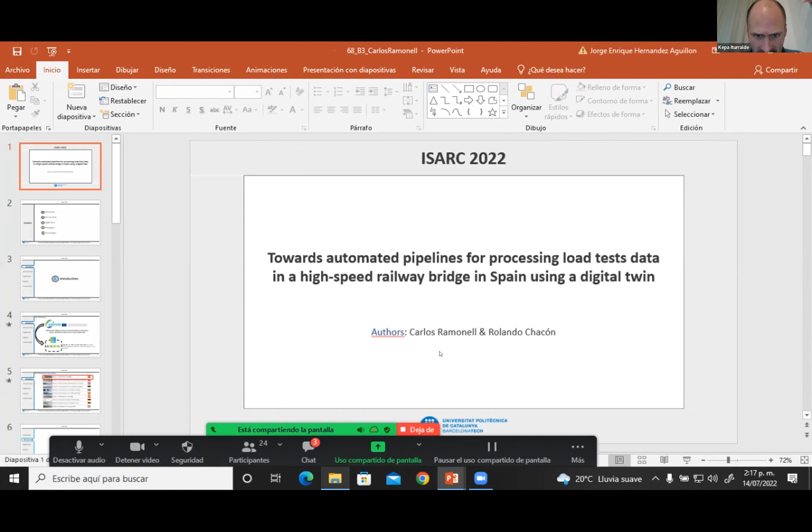The title of the paper presented is Towards Automated Pipelines for Processing Load Test Data on a High-Speed Railway Bridge in Spain using a Digital Twin. The authors are Mr. Carlos Ramonell and Rolando Chacon.

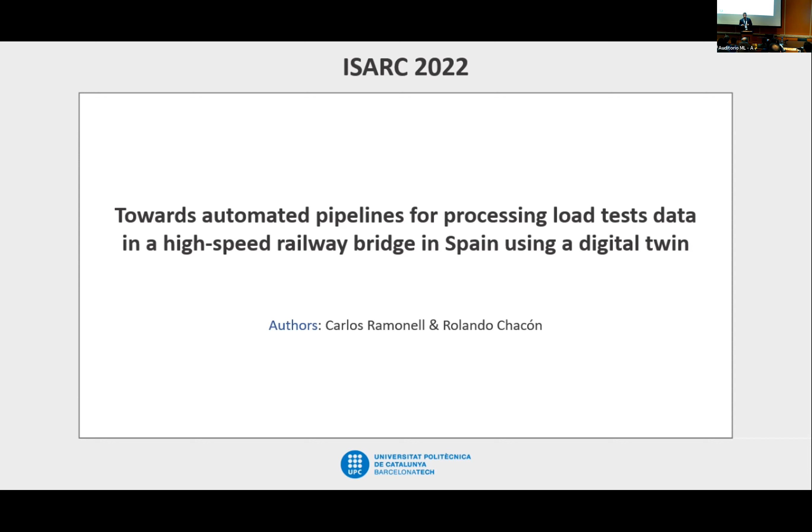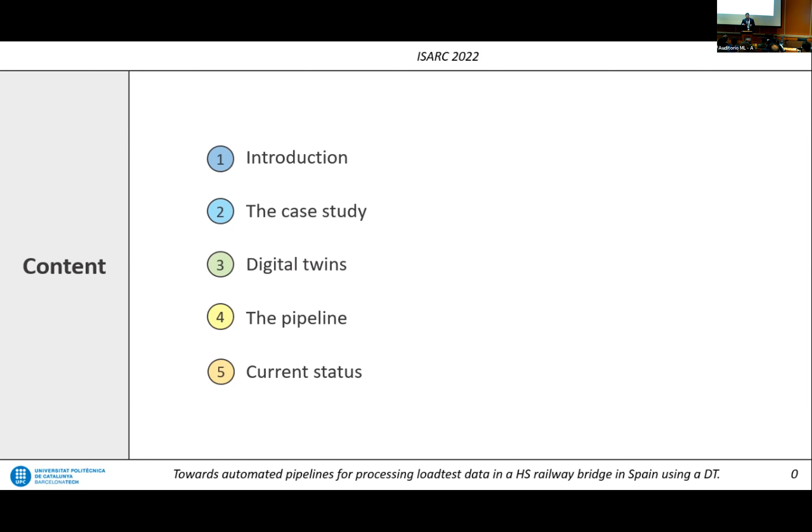So these are the contents of the presentation. First, I will go through a brief introduction of the study. Then I will explain the case study. Then I will explain how we implement digital twins in the case study, and then how we build the pipeline using the former parts. And this study was 1 year ago, so now I will make an update of where we are now.

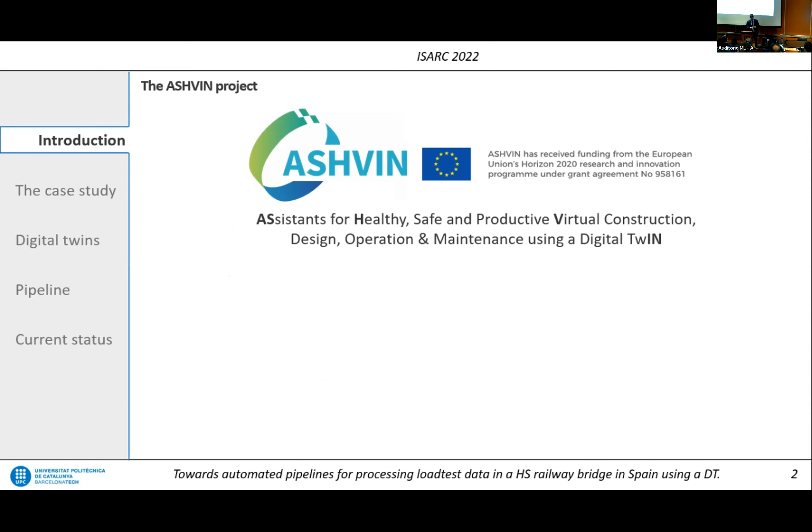So this study is carried out within the ASHVIN project, that stands for Assistants for Healthy, Safe, and Productive Virtual Construction, Design and Maintenance of Assets using Digital Twins. More specifically, we are working on the development of a toolkit that is called MATCHFEM, that aims at integrating IoT with numerical analysis to calibrate models to be used in a digital twin.

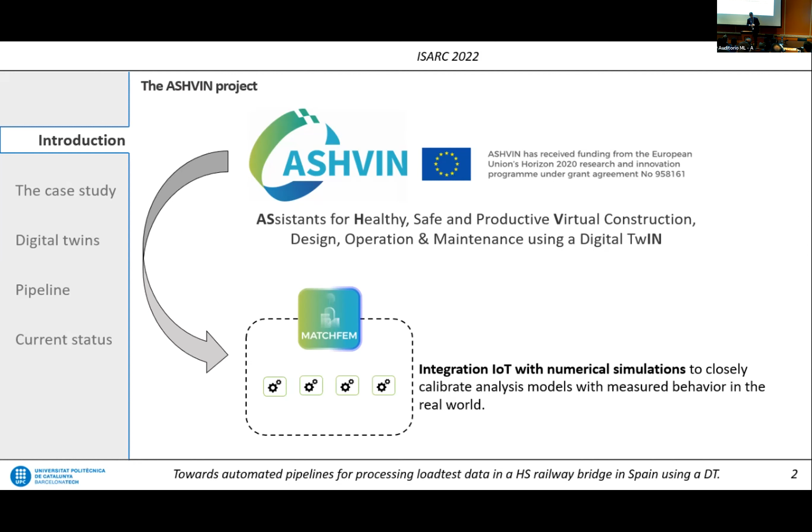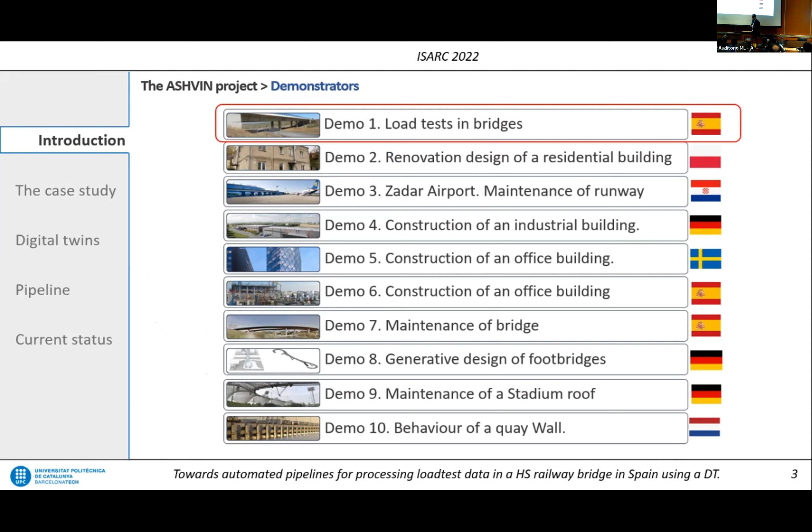So the project also provides a large number of demonstrators. As you can see, they are spread all over Europe. And we are only focusing on the first one, that is load tests in bridges. And now we move to the case study.

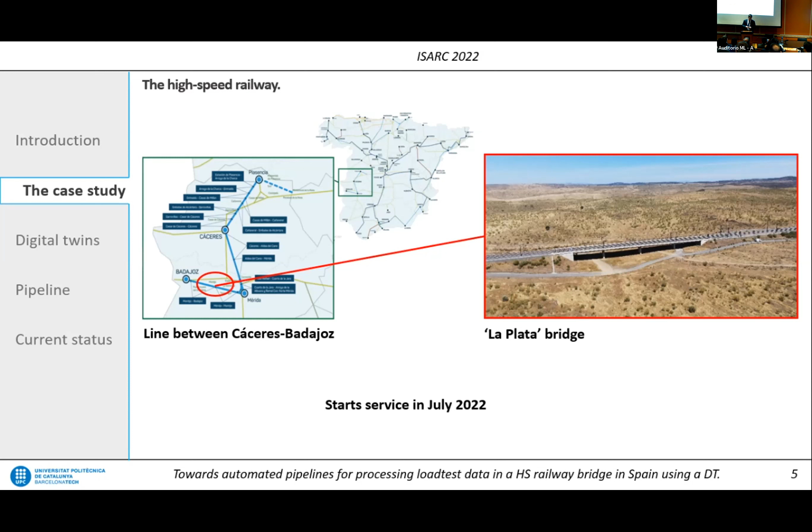So we perform load tests in a high-speed railway line that is located in Spain, in between Cáceres and Badajoz, that is a city near the Portuguese border. And this line has 4 bridges that were tested. We are focusing only on one, that is La Plata, this bridge here, that started service in July 2022. And what is a load test, a proof load test?

So it is a structural assessment that is carried out in between the construction and the operation phase to prove that the structural performance is as designed. The load test has different tests in it that can be static tests or dynamic tests, and these are required by law. And then we have a standard. It is a standardized process that the Spanish authorities made.

And the objective is to match data that we have on the field with the as-designed models that we created before constructing the bridge. And for that, we measure accelerations for the dynamic response, we measure deformations, and also vertical displacements. So after matching this data with the model, we will get a reliable model that can be used in a digital twin to perform numerical analysis in the future. So it is the birth of the digital twin's ability to perform structural analysis.

So now we want to do this in a digital twin. So how do we build one and what is it? A digital twin is a virtual replica of a real asset that is actively connected with it. In this case, the real asset has a series of sensors as information sources that send information to the virtual replica, that in our case is composed of an IoT platform linked to an information model, and to this tandem we can connect pipelines that add functionality to the digital twin.

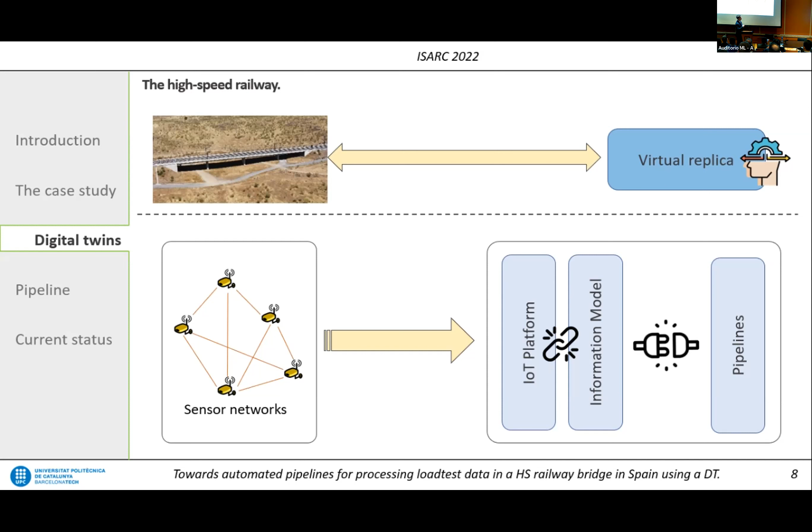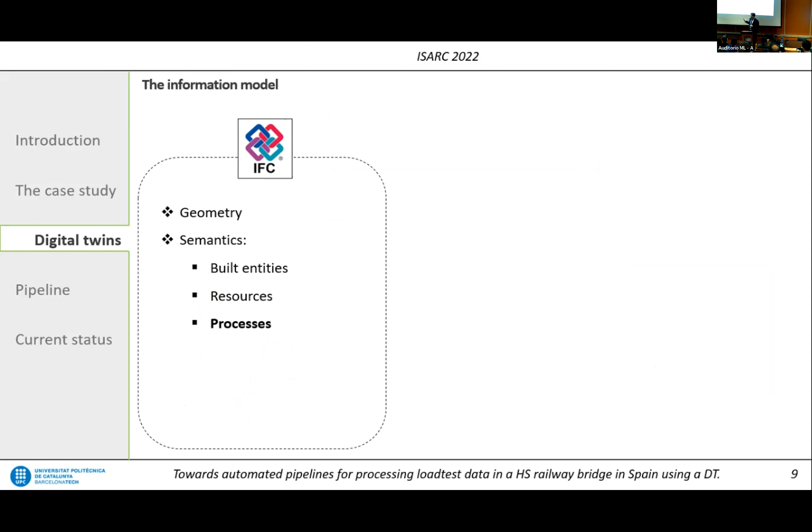So that's the bridge, the real asset. And for the information model, we use IFC, that is a BIM standard. With IFC, we can model geometry, but also semantics related to built entities, resources, and also processes. And it's in these processes where we can model the load test: each test of the load test is an IFC task that is part of an IFC work schedule, that is the load test, that is part of an IFC work plan, that is the maintenance plan of the bridge.

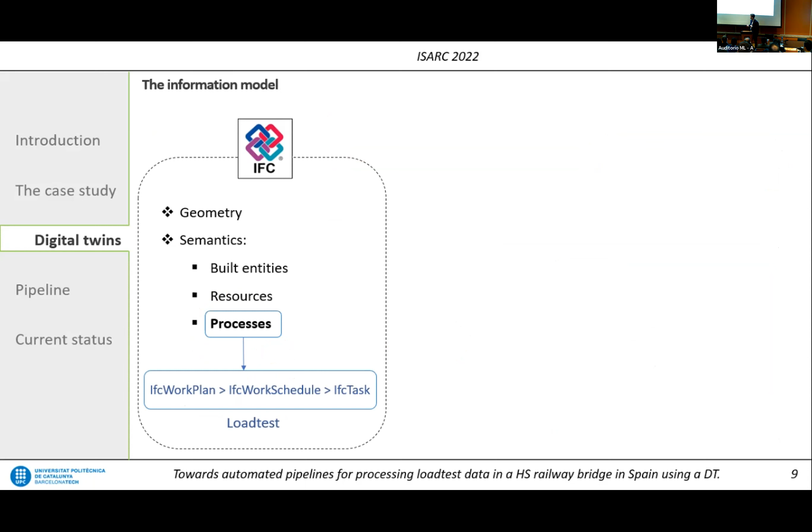So this model has a lot of interconnected information, and in this figure here, we can see how we connect the model of the load test with the model of the bridge.

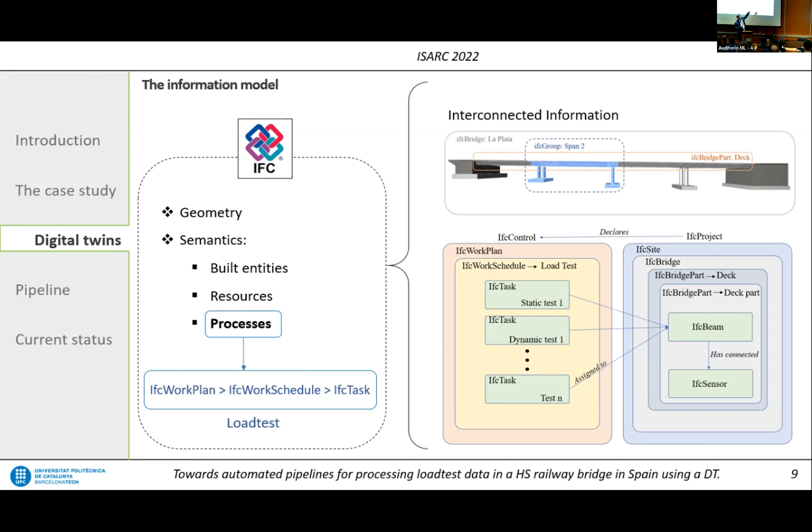You can see that we connect different tasks to a specific beam on the model, and that beam has also connected sensors, so we can access the data of the sensors through the beam that is connected to a specific task in the load test.

And for the IoT platform, we use Mainflux. That is an open source platform that everybody can use. And it's very easy to use, and it connects devices in the field with third-party applications using two entities, mainly, that are things. Things are anything that provides information to the platform or to the applications. And the channels. The channels are the pathways through which the data is running from the devices to the applications.

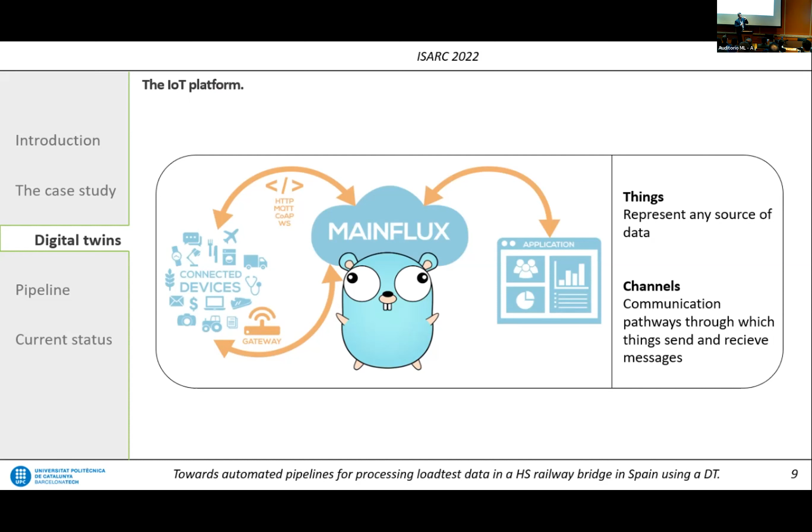So we need to map these two entities, the information model and the platform. How do we do this? We map the unique identifiers of the IFC sensors with the unique identifiers of the things in the IoT platform, and we map the identifier of the load test or the work schedule with the channel of the IoT platform. Then what we have, and we can say it with natural language, we have a sensor that is sending information through a load test.

So this is a quick snapshot of the platform inside. We can see up, we have the thing information with the ID. Then we have some metadata that contains also information in the model, in the IFC model, just as a backup. If something happens with the model, we can quickly back up the model using this information in the metadata. And here we have the channel to which it is connected.

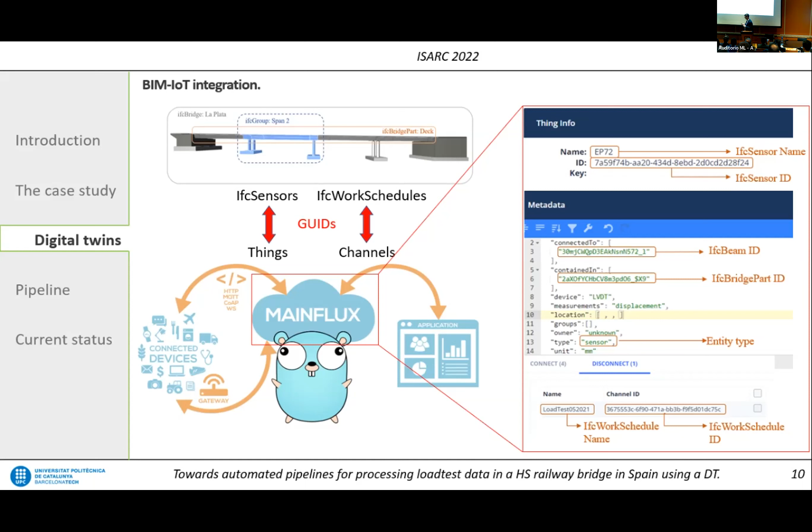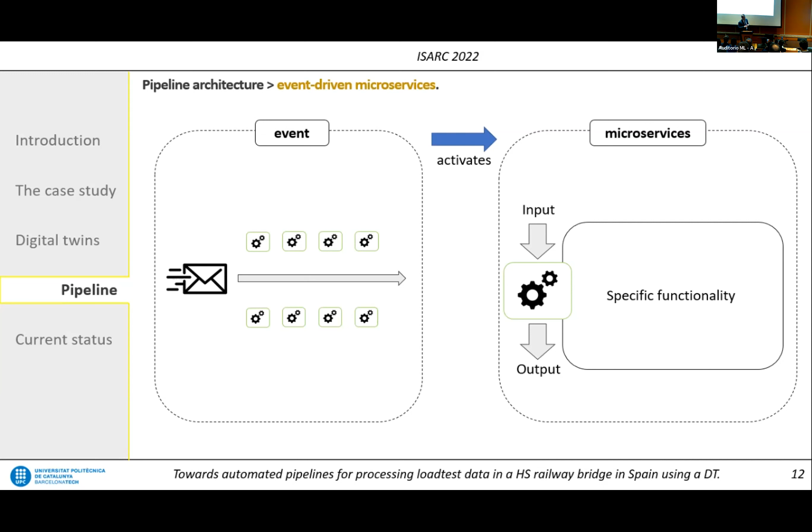So now we have the information model and the IoT platform connected. How do we add functionality that uses the information there? So we built a pipeline. And we propose to use an event-driven microservice architecture that will have two parts. One is the event, that is just a message that contains information and that runs through a whole system of microservices. And eventually one microservice will say, okay, this information is for me. I will activate and perform what I have to do. And the microservice is just a container of code that has a specific functionality and also has a networking capability, so we can connect to the web.

So this happened almost 1 year ago. So where are we now? We are changing a little bit the architecture. The IoT platform and the functionality inside the BIM manager are being merged into a more complex platform that is a common data environment. It's a BIM concept that is rising now. And then we are trying to get rid of the IFC limitations by just taking the ontology that IFC provides and instancing that using graph models. And then we can expand the information model with our own considerations for processes or so.

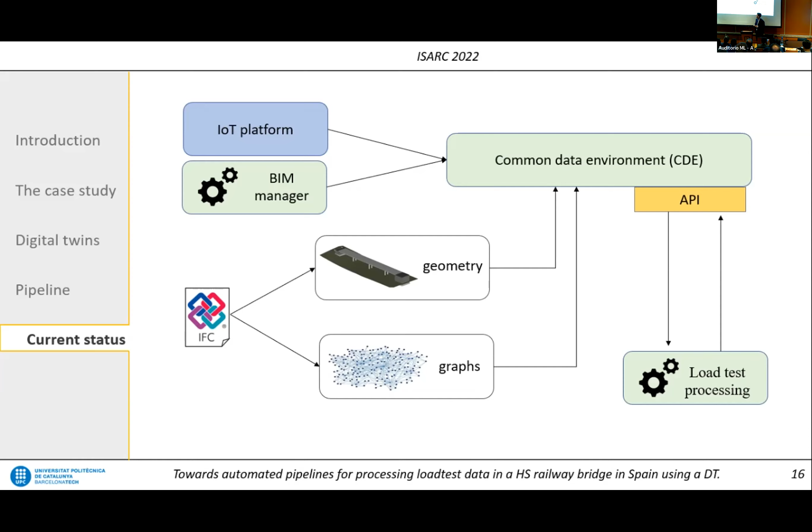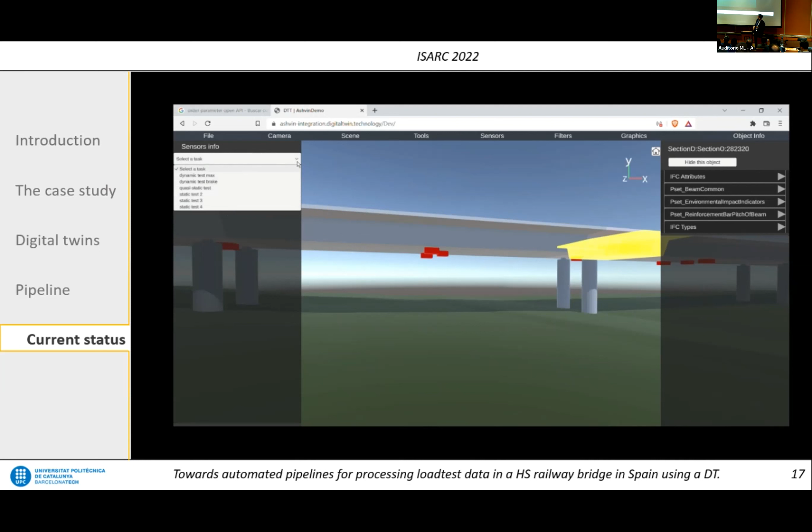Then this common data environment has an API that allows the services to connect and perform the functionality that we explained before. And also we are developing a user interface through which we can trigger these events and use this functionality that we are adding. And in this user interface, we can play around with the model, we can visualize the sensors, we can see the information in it, we can select one sensor, select one task in which they have participated, then we can retrieve the data, do something with it, and then we can also see the results of the load test that we will see now.

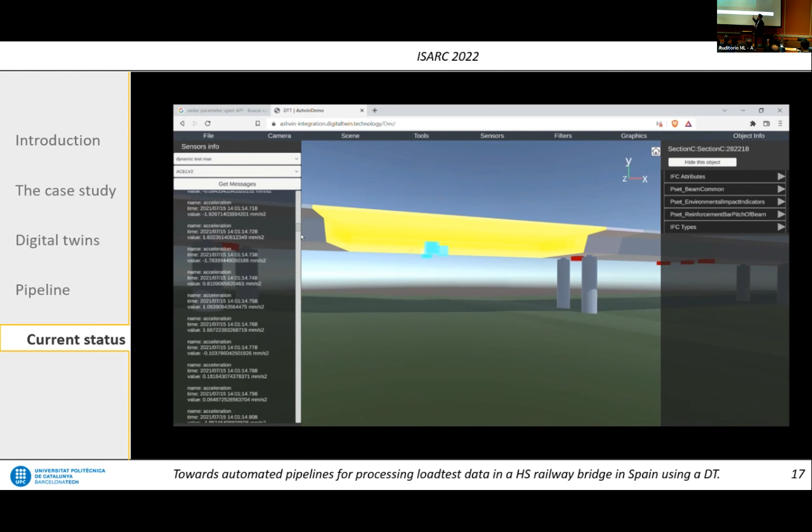Yeah, these are the results of the load test. We have different hypotheses, and these are the structural results. And the next step is, okay, we have the results of the model, we have the data processed. Now we want to calibrate the model. And well, that's it. That's my presentation.

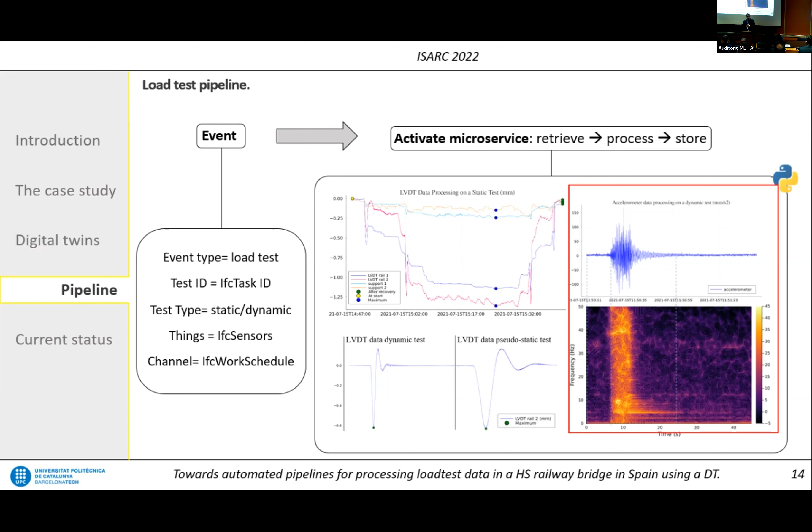All right. Thank you for a great presentation. I have a simple question. You showed us the UI platform of your work. Is that platform being updated in real time, or is it something else? The platform allows us to send information in real time. It allows us to connect devices and send information in real time, and we can also upload data anytime. Here we cannot see it, but it has an API that we can use to send information there.

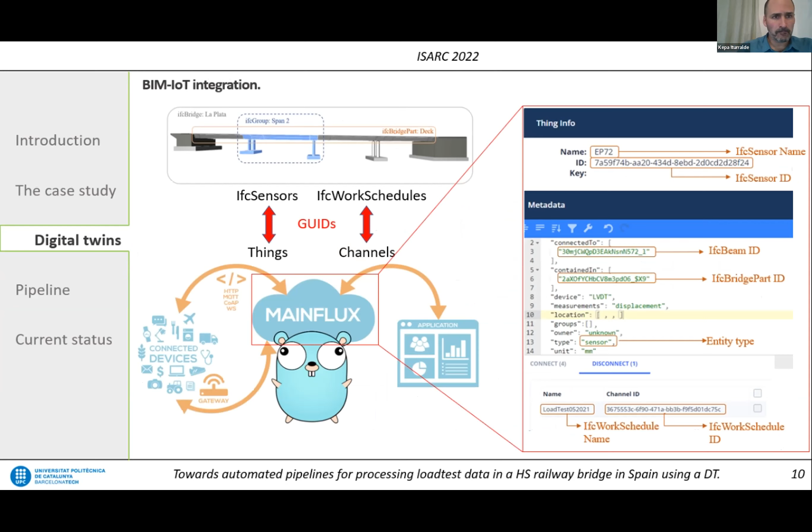Do you use the IFC ontology only to model all your data, or do you use a linked data approach where you use various ontologies that you link together? At the moment, we only use IFC, but we became aware of the limitations it has. So we are trying to change the format so we can extend it. And that's where we are now. Okay. I'm on the Cogito project, so I see a lot of similarities. So it's really interesting.

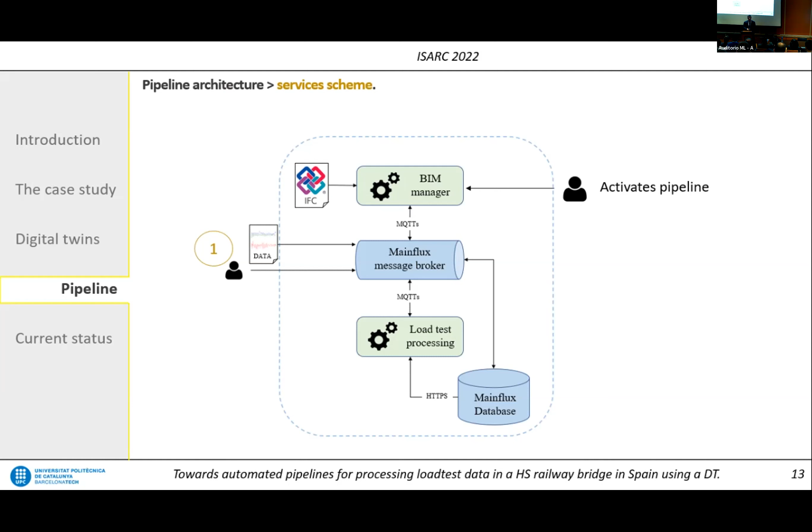And the speed of the train is also measured, I guess. Yeah, this is defined in the standard of the load test. The train passes at 40 kilometers per hour, 80 kilometers per hour, and maximum speed. There are 3 passes, and we measure the information there.

So thank you very much for this very necessary research, because for the future maintenance of all bridges, this type of study is necessary to check the loads and the movements of the bridge, how much it is moving, especially vertically, and whether there is a risk of generating cracks or damage due to this.